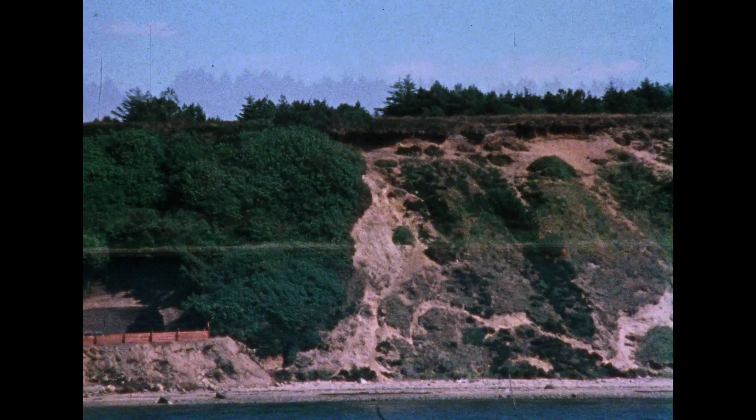A bridge that not only benefits local traffic, but also supplies the missing link in the diagonal cross-country road through Jutland, from Aarhus northwest to Viborg, and Skive, and on across Mors to Thisted, right up to Hanstholm.

Previously, the ferries plied between Pinen and Plagen, that is, the pain and the plague, 135 times a day. But finally the pressure of traffic was so great that there were often long waiting times.

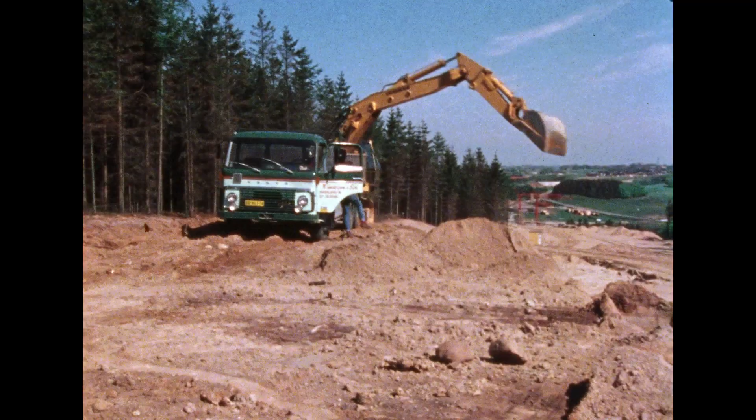In addition to Sallingsund Bridge, adjoining roads and bridge structures had to be built, covering a total length of about 40 kilometers.

The neighbouring roads pass through some of the prettiest scenery in Denmark. This is how it looked before the bridge. The connection was to lead through the hills called Legind Bjerge.

On October the 5th, 1973, Per Milner, the head of the road directorate, signed the contract with the Sallingsund consortium, which consisted of the Danish engineering firms of Kampmann, Kierulff and Saxild and Højgaard Schultz, together with the French firm of Campenon Bernard and the German firm of Polensky and Zöllner. At the international tender, these firms were the cheapest, offering an alternative project both for the substructure of the bridge and for the superstructure, based on prefabrication.

On November the 19th, 1973, work was officially set in motion by the Minister of Transport. The head of the road directorate spoke first.

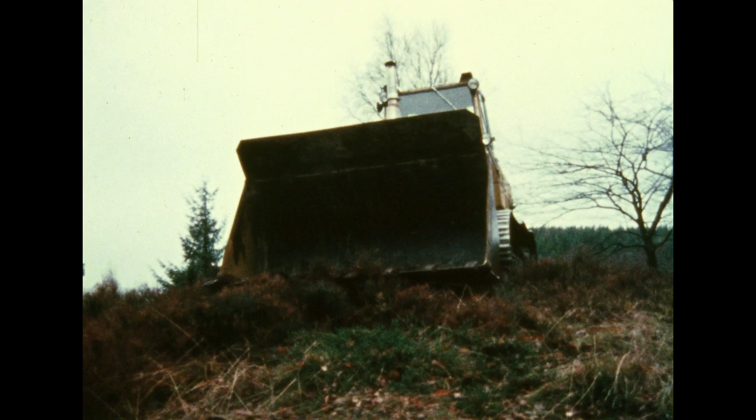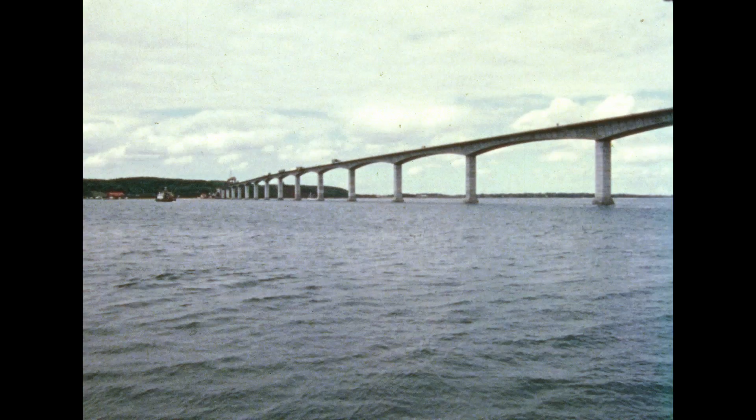The bridge is 1,730 meters long, with normal spans of 93 meters, side spans of 51 meters, and 2 navigable passages of 60 by 26 metres. The 16-metre broad cross-section between the 2 windshields is divided into an 8-metre carriageway with cycle paths and pavements on both sides.

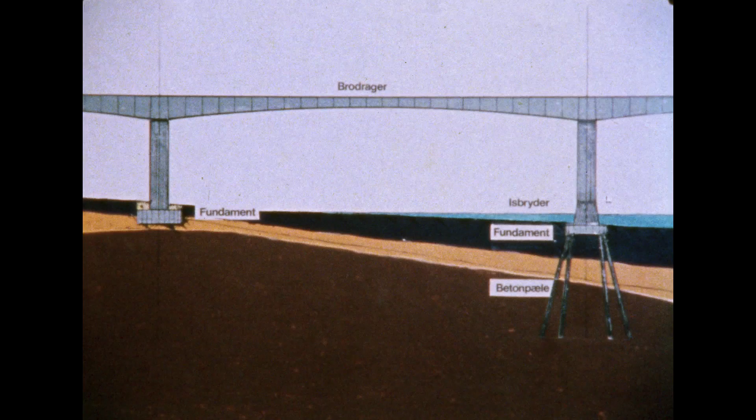Pier 1 is founded directly on the seabed. Pier 2 is founded on reinforced concrete piles. Most of the piers in the water are founded on steel piles, filled with concrete.

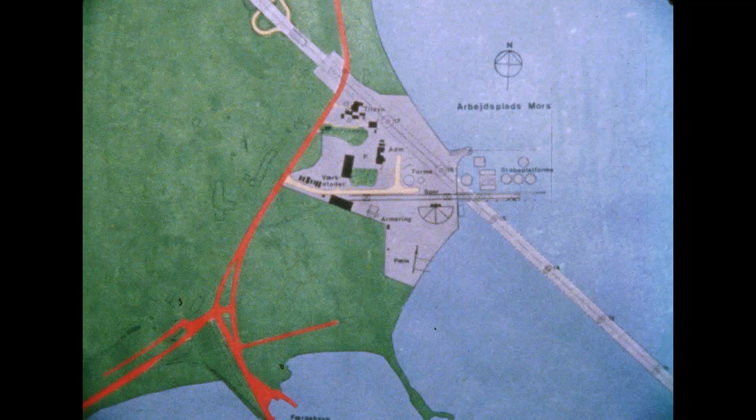The complete substructure project was carried out from the site on Mors. Here are the stockyard and the production area for the tubular steel piles.

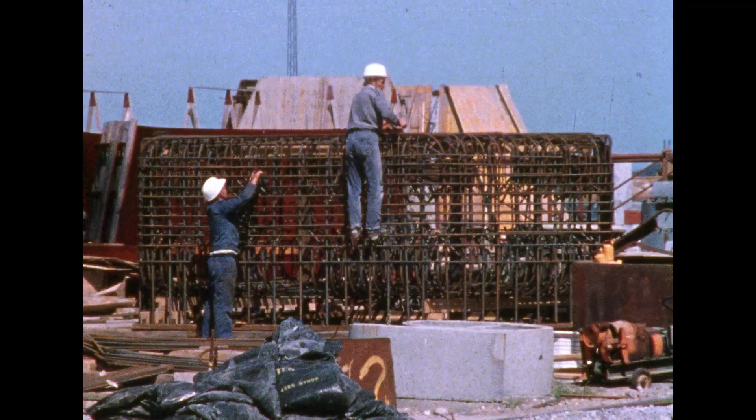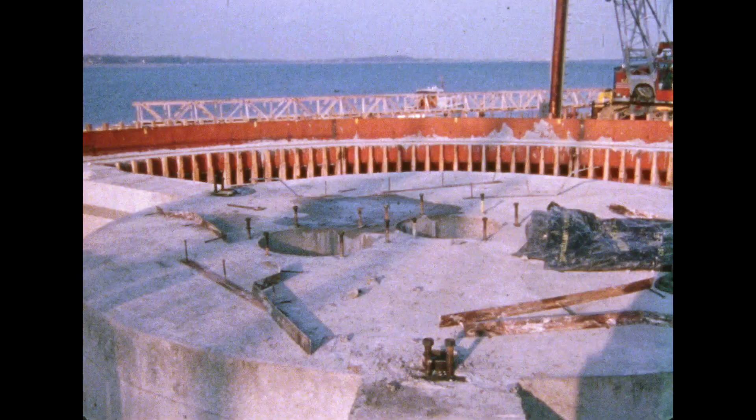The reinforcement for a piling template was prefabricated complete in one unit, before being transported to the casting platform. Here we can see the holes for the piles in the template's ring-shaped casing. A floating crane transports the template and lowers it down onto a special platform.

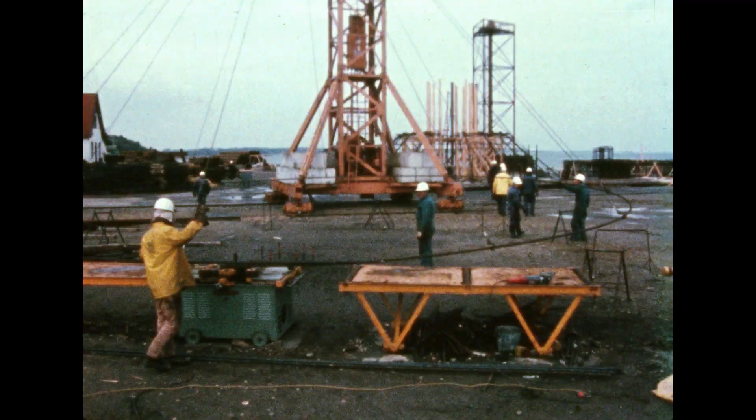Here, the reinforcement is bent for the pier box. The final length is measured and the rings are butt welded.

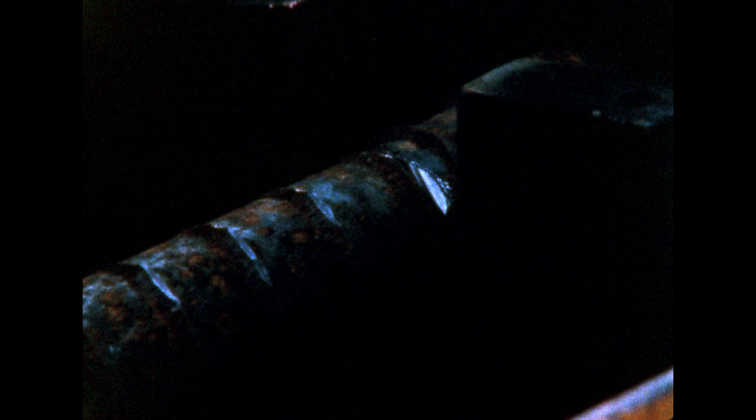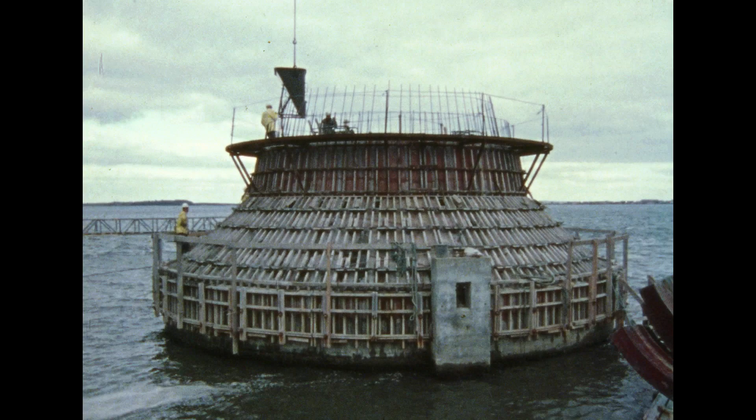Construction of the reinforcement for the lowest part of the pier box is in full swing. Shuttering for the lowest part of the pier box has now been erected on a piling template placed on a platform, and concreting is underway. The projecting steel bars are starter bars for the central part of the pier box.

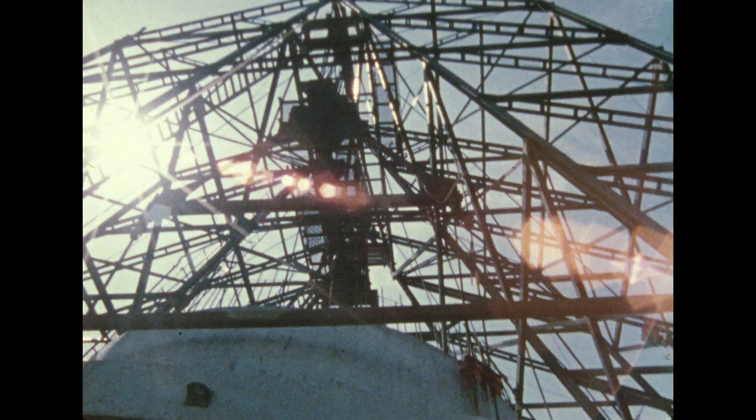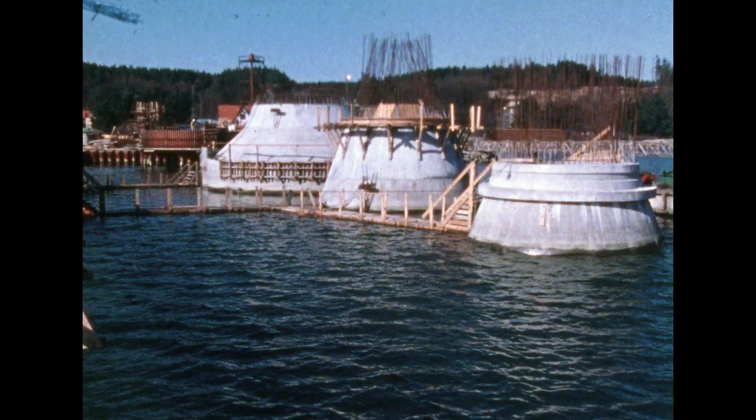As the lifting capacity and the height under the hook of the floating crane are limited, the pier boxes are cast in the working dock in 3 stages, 1 stage for each platform, and at 3 different depths of water, so that the final casting takes place on the deepest platform.

On the bridge centre line, there's about 15 metres depth of water, 15 metres of silt, 10 metres of loosely deposited shale, and under that the bearing layer of meltwater deposit. So we've got to get down below the level minus 40 metres to find a foundation layer, and it's this that has determined the choice of pile founding.

In all, 3 bearing piles are driven for the piling template. They're provided with caps on which the template rests.

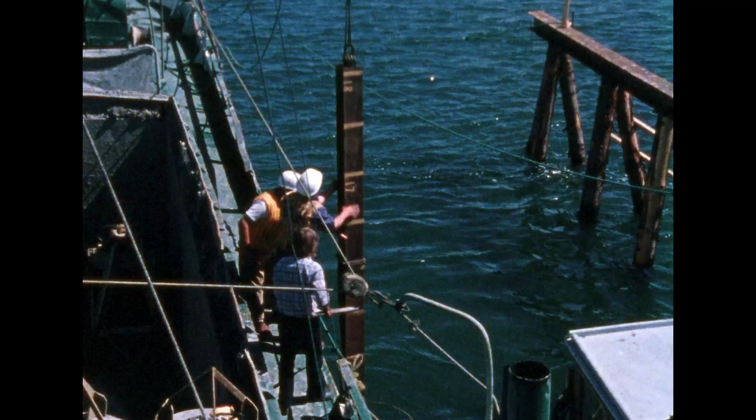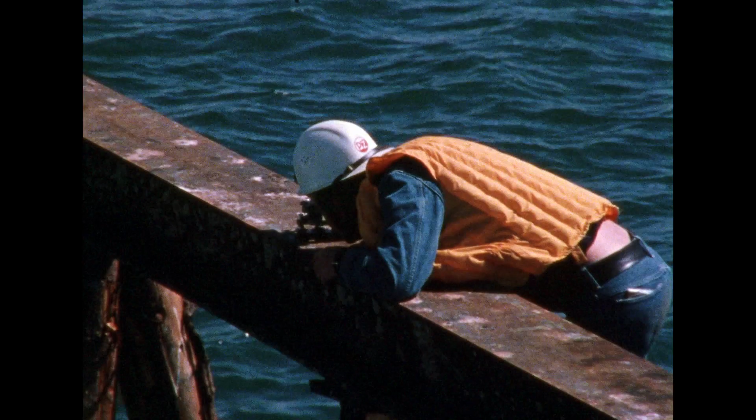Before these caps are constructed, the tops of the bearing piles are measured up in detail. The caps for the bearing piles are then tailor-made on land, using the measurements taken by the diver.

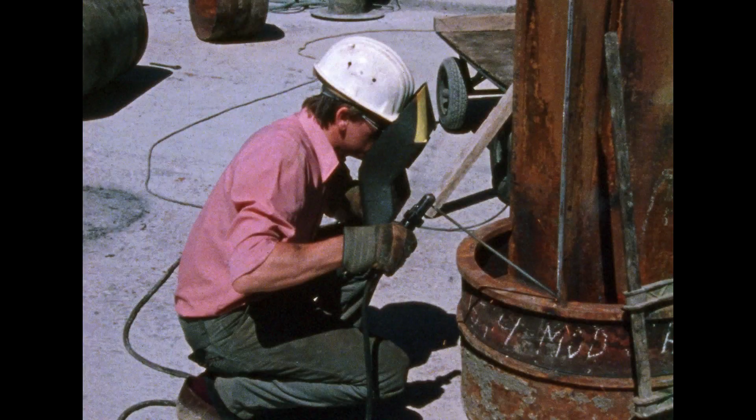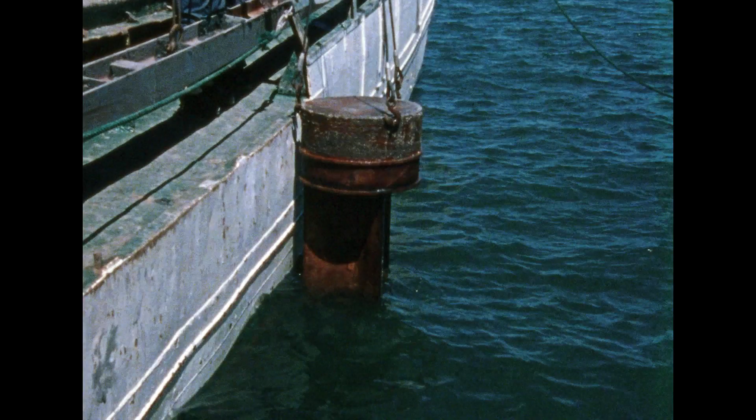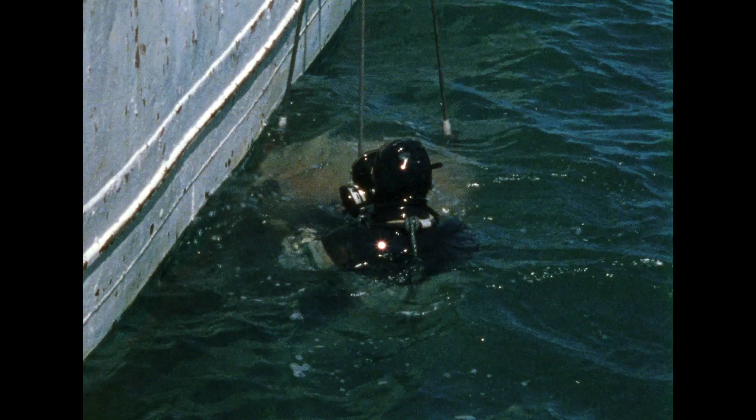The pile caps are fixed to the bearing piles with the help of a diver. The template is fitted with an alignment tower with optical plumb, so that it's possible from above the waterline to determine the position of the template.

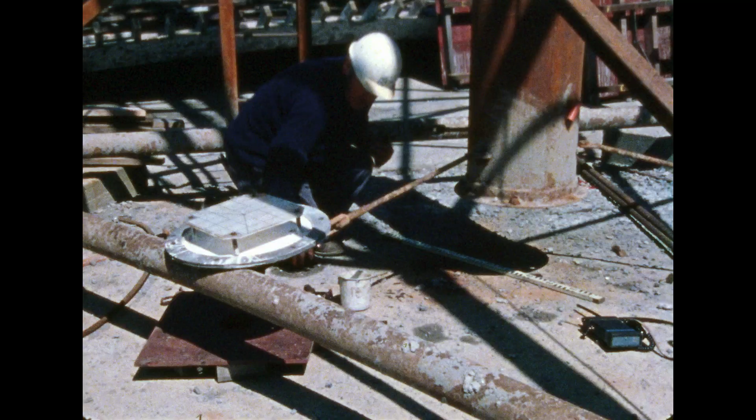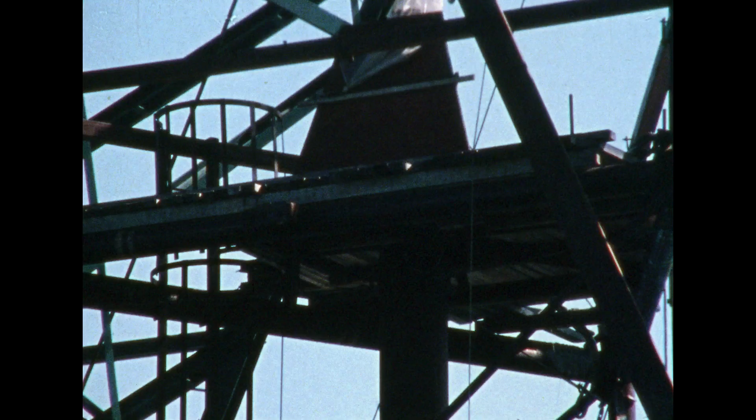The template is temporarily provided with 3 bearing girders resting on the bearing piles. The sighting plate for the optical plumb is fitted. The template with its alignment tower is now ready for submersion. The correct positioning of the template is ensured from the shore.

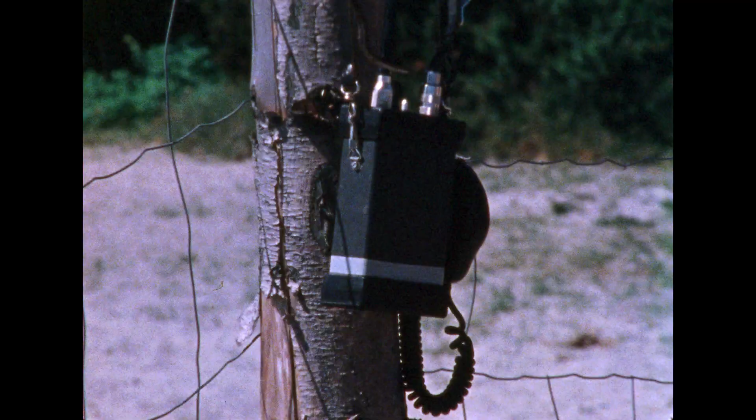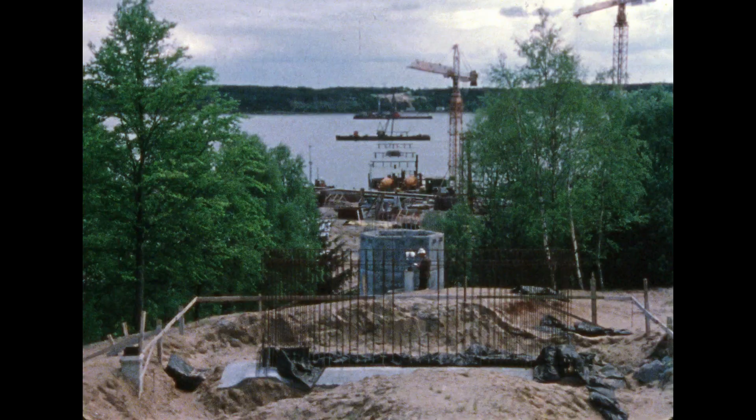And the positioning is controlled in the water with the help of the divers. A further check is made from both shores using the intersection of lines of sight. Here you can see the template with the holes through which the piles will be driven.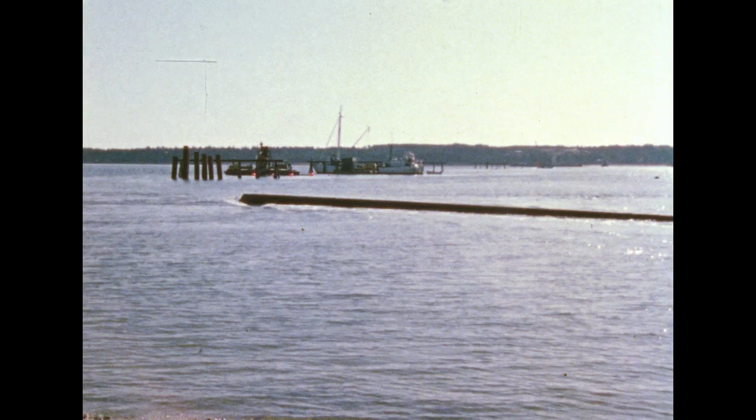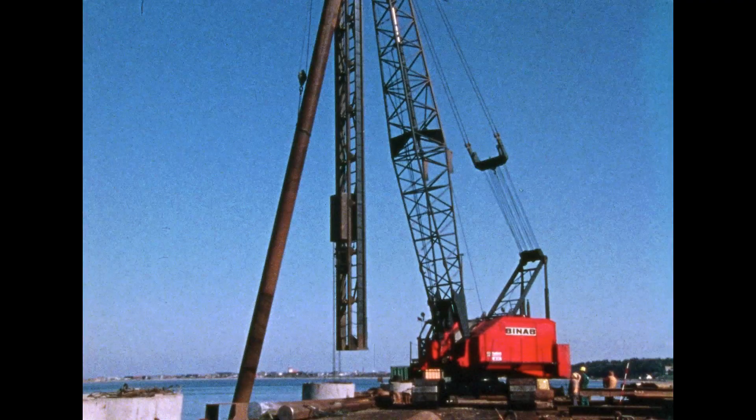The steel tubes for the piles have a diameter of 70 centimeters and an average length of 25 to 30 meters. The piles are driven through a guide tube which is kept in place from below by the template and from above by a girder system constructed between the wooden trestles and the pile driving barge. The lower 2 meters of the piles are filled with concrete and the piles are driven internally with the aid of a dolly.

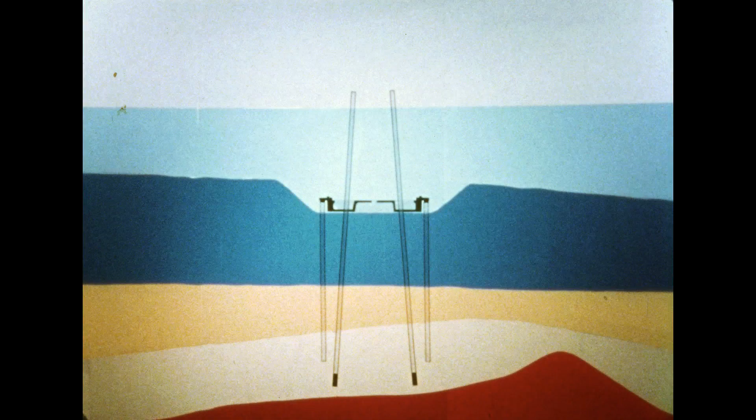In the first instance, only a limited number of piles are driven. These are the test piles, together with a central pile and counter-action piles for the test loading. Test loads are carried out at all the piers. These results, together with the results of the previous geotechnical tests, determine the number of piles, the pile toe levels, and the positioning in the template.

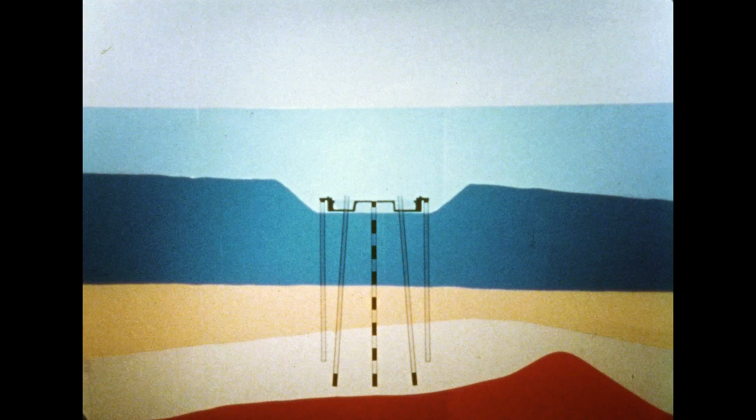Now the counter-action piles and the test load pile can be cut to level, and the final pile driving can take place. For the first piles, a 12-ton monkey was used. Because of the difficulty of the pile driving, this was later exchanged for a diesel hammer with a 5.5-ton piston.

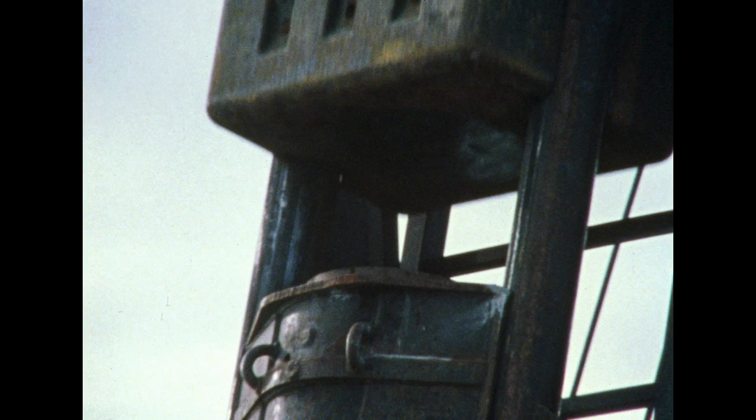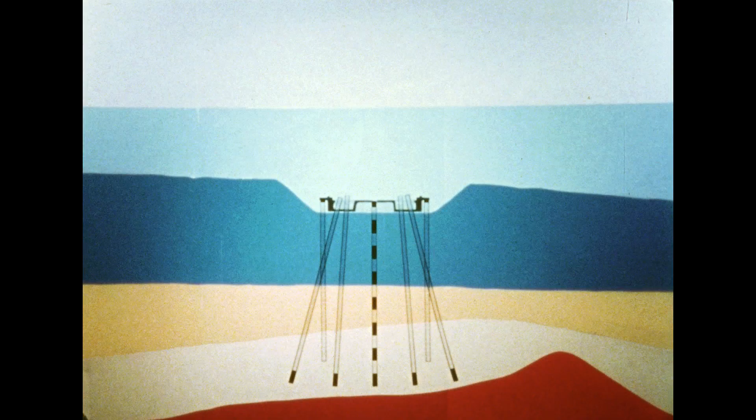The piles are placed in 2 conical surfaces, one with its intersection on the waterline, the other with its intersection in the bridge girder. Here we can see the template with the piles driven and shortened. Now comes the casting with underwater concrete around the pile heads. For this, mobile casting equipment is used, and the casting is made right up to the edge of the casing.

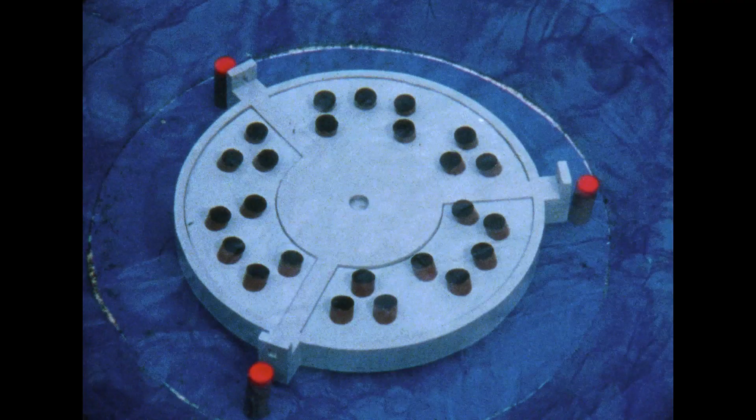To prevent corrosion, the uppermost part of the piles is reinforced with a prefabricated cage. Now the bearing girders for the template can be removed. Here is the casing, fully cast. The position of the concreted template is checked with the aid of the alignment tower. The pier box is equipped with a temporary cover.

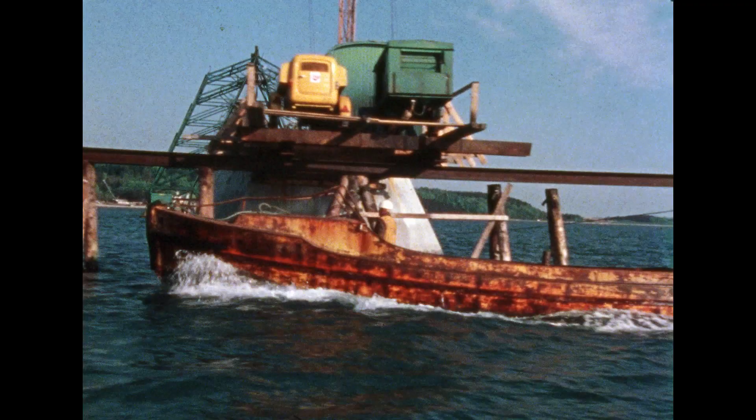Air is pumped into the pier box so that a balance is achieved between its weight and the crane's lifting capacity of 200 tons. The pier box is transported out and lowered onto the template. The pier box is equipped with an alignment tower.

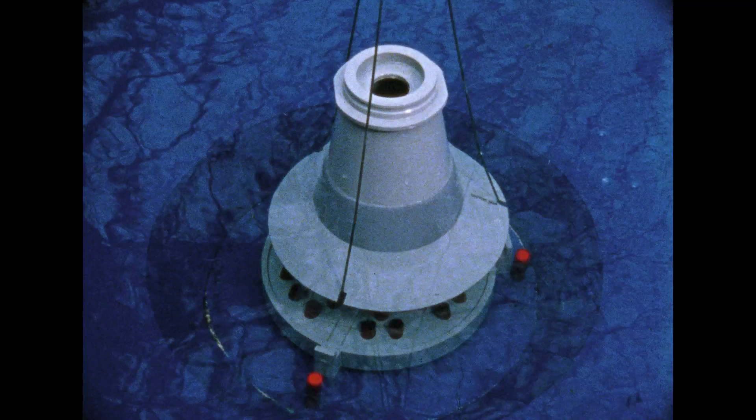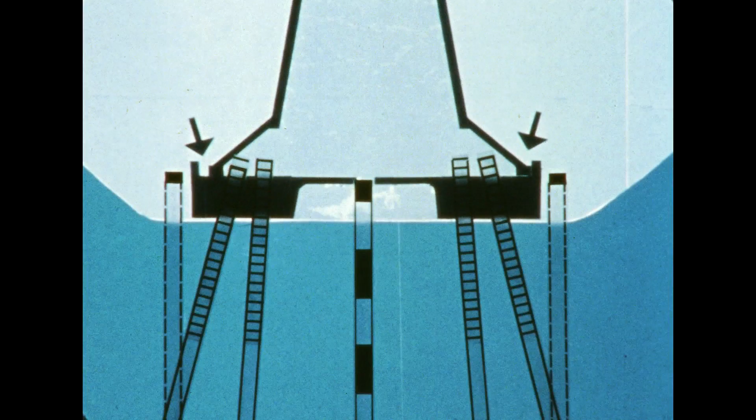If the template is out of line with the correct position, it's possible to position the pier box eccentrically in relation to the template. The joint between the template and the pier box is sealed with a rubber gasket. Then the icebreaker unit can be placed.

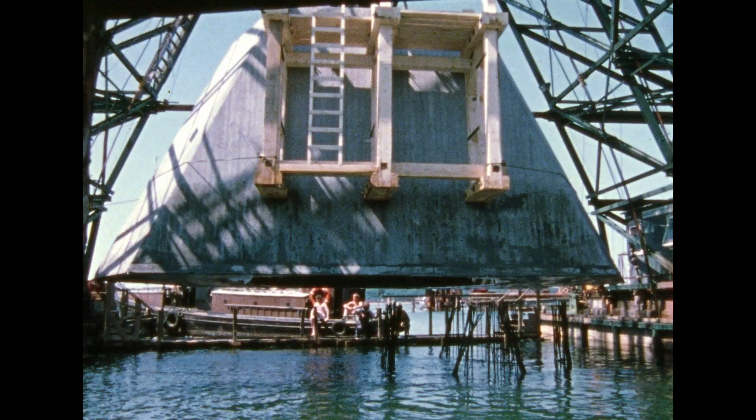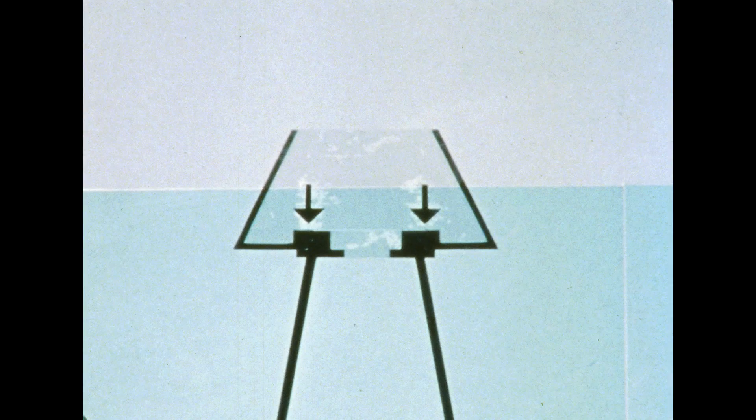It's transported out with the aid of a floating crane and placed on the top of the pier box. The space between the pier box and the icebreaker is filled with underwater concrete. A cover is fitted over the test load pile.

The water is pumped out of the assembled units and a working chamber with normal pressure has been created. The pile reinforcement is raised up into place and the piles are cast. The ring-shaped body above the pile caps is reinforced and cast. In the same way, the icebreaker box is reinforced and cast too.

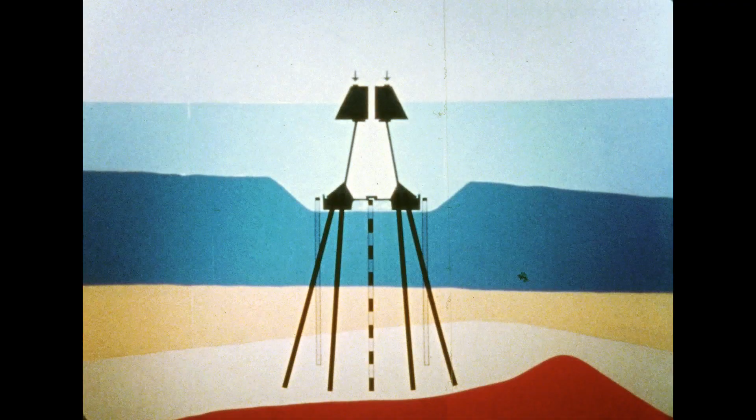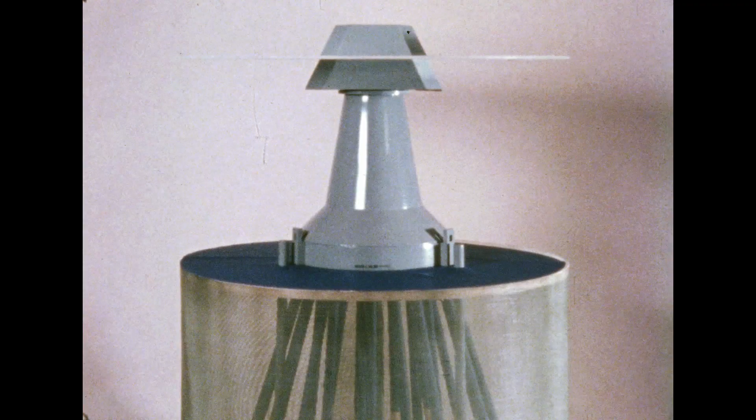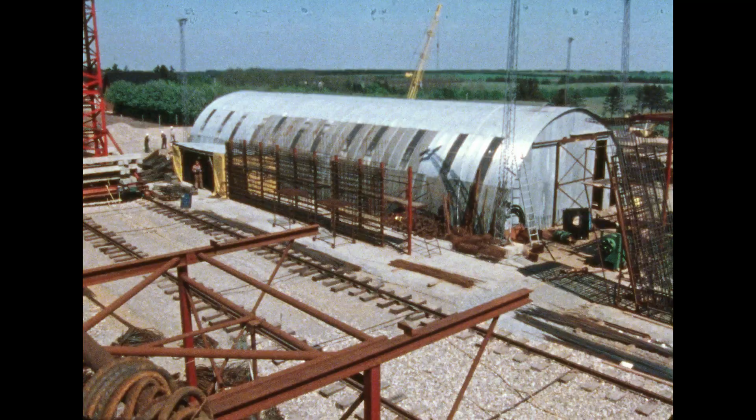As we can see, the bridge superstructure is made up of segments, standard segments in the spans and pier segments above the piers. All the girder segments are constructed at a field factory on the Salling shore. Here the reinforcement is assembled in units.

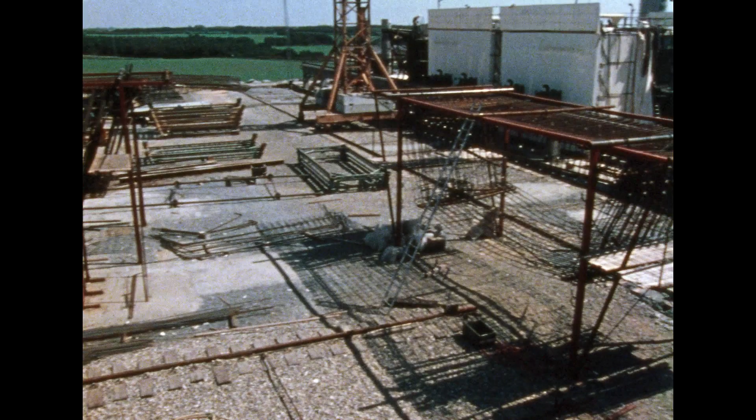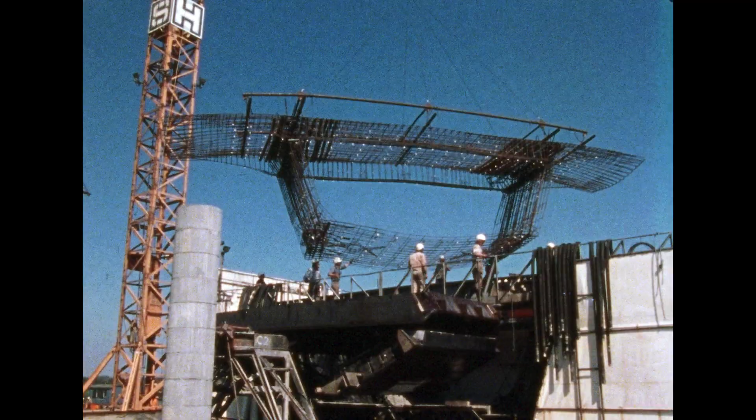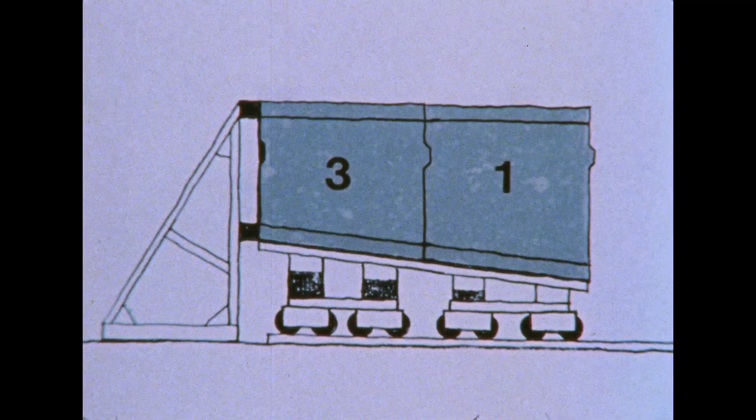These are the casting molds. A completed reinforcement unit arrives at the casting mold. Here in diagram form is the casting of standard segments. The principle is that the two segments that are to lie side by side in the bridge girder should also be cast against one another, side by side. The segments are placed in the storage yard.

The gantry has a central support, a rear support, a front support and a mobile support. In the situation shown here, neither the front support nor the mobile support are in use. The gantry is equipped with cables which ensure distribution of the load between the central support and the end supports. A trolley is suspended under the gantry girder.

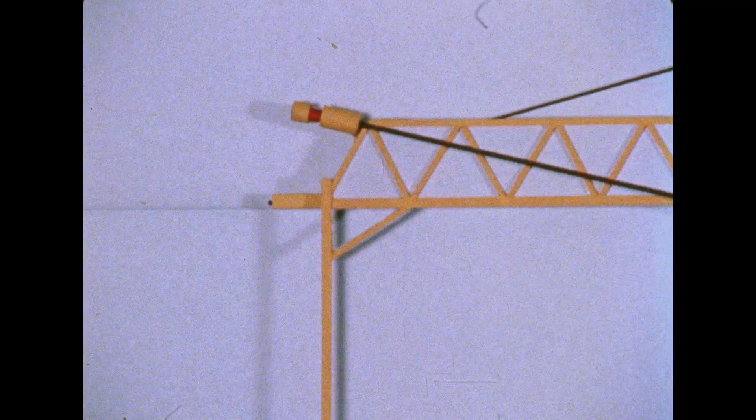Here, the gantry is being moved forward to begin the erection of the next span. In reality, the movement is much slower than shown here. The same goes for all the other model recordings. Now the gantry is in place. The front support is adjusted, and the gantry's cables are tightened to relieve the load on the central support, which is resting way out on the newly assembled cantilever section.

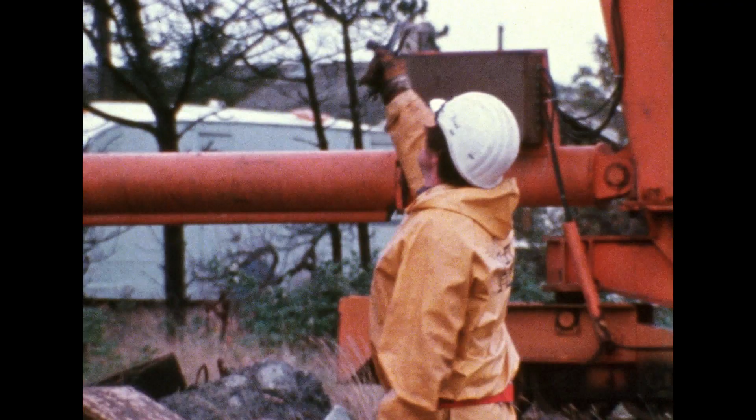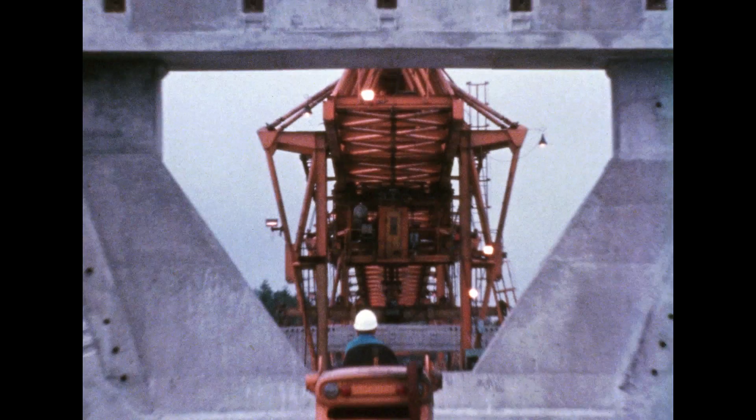The first pier segment, which is transported by low loader, is suspended from the gantry's trolley. A pier segment is removed from the storage yard by a portal crane and placed on a low loader. The segment is turned 90 degrees and the trolley with the segment is driven forward to a position in front of the front support. The segment is again turned 90 degrees and lowered into place.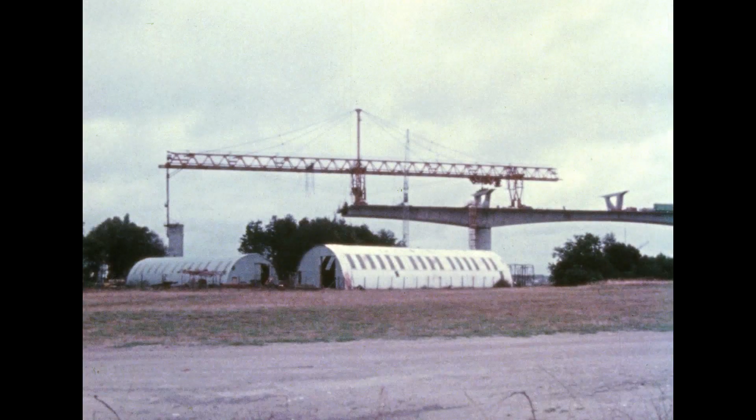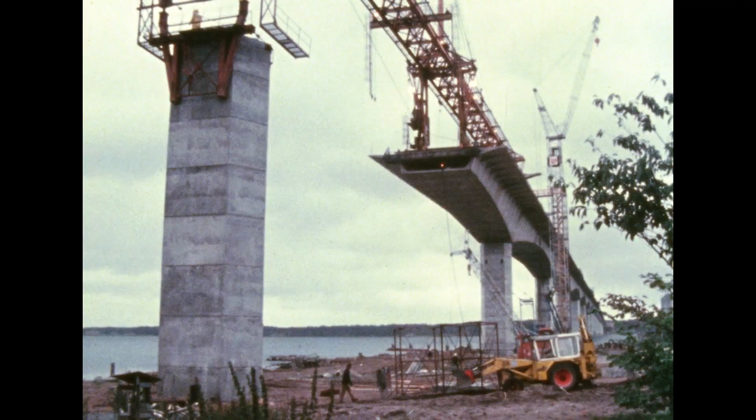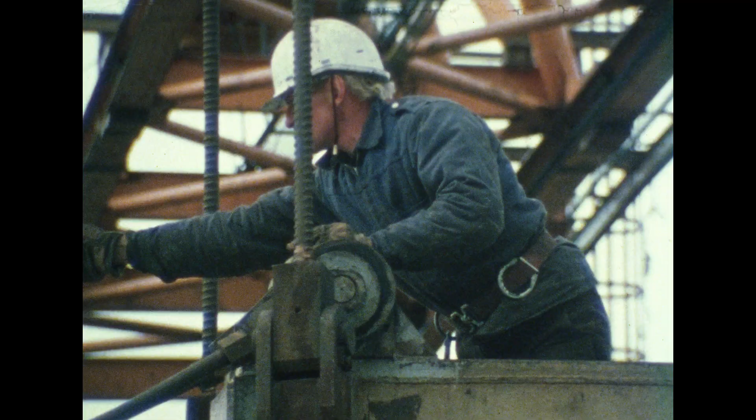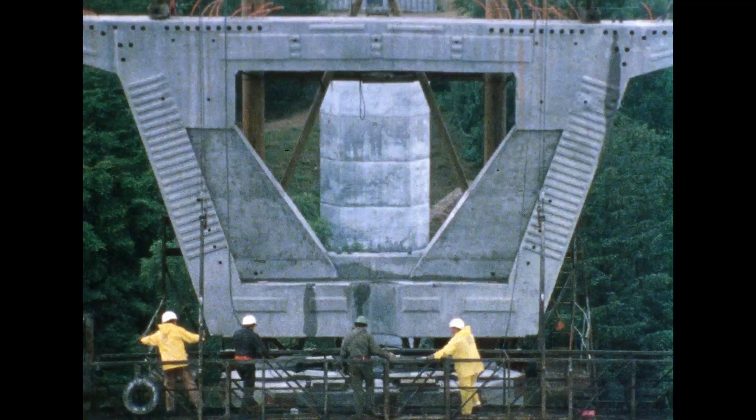The top of the pier shaft is fitted with temporary bearings and adjustment devices. The second pier segment is similarly erected, together with the first standard segment on the Salling side. These are glued together and held by Dywidag rods, which are fitted inside in ducts embedded in the concrete, but shown here on the outside.

The mobile support arrives on the low loader and is suspended from the trolley. The trolley is driven to the central support. The load on the central support is transferred to its auxiliary support by means of jacks. The central support's crossbeam is transferred from the main support to the mobile support. The trolley with the mobile support is driven to the pier shaft with the newly erected segments.

The mobile support has taken over the role of the front support. Pressure is relieved on the central support and the gantry moves relative to the mobile support with the aid of the trolley's motor. When the gantry has moved out a certain distance, its cables are slackened. The gantry moves on until the central support is abreast of the mobile support. The gantry load is transferred from the mobile support to the central support.

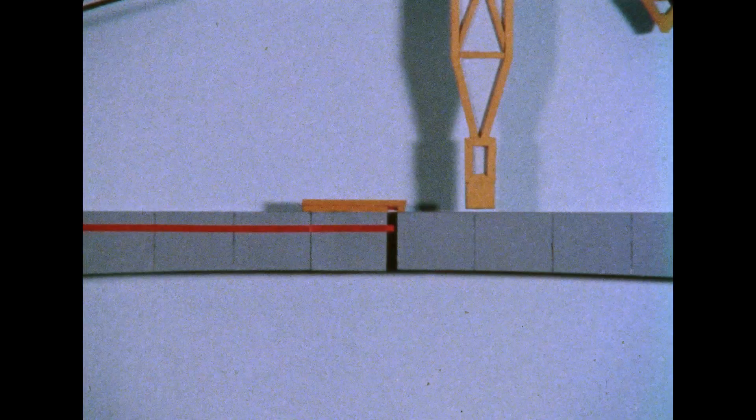When all the 12 segments have been assembled on both sides of the pier shaft, the closing segment in the last span is lowered into place and is borne temporarily by a special girder construction. The segment is bolted to the previous one. The final joint is sealed by in situ casting.

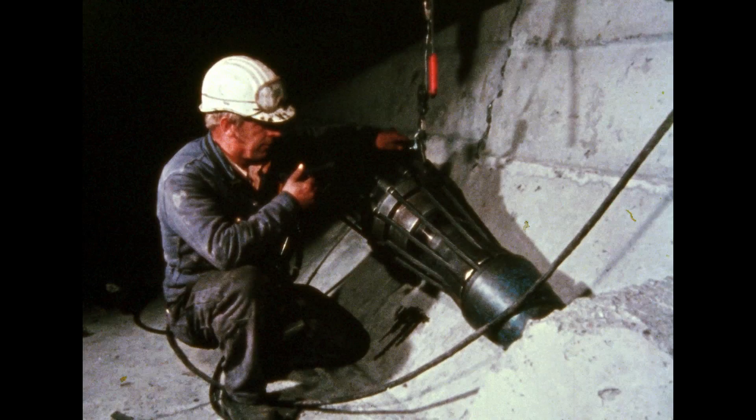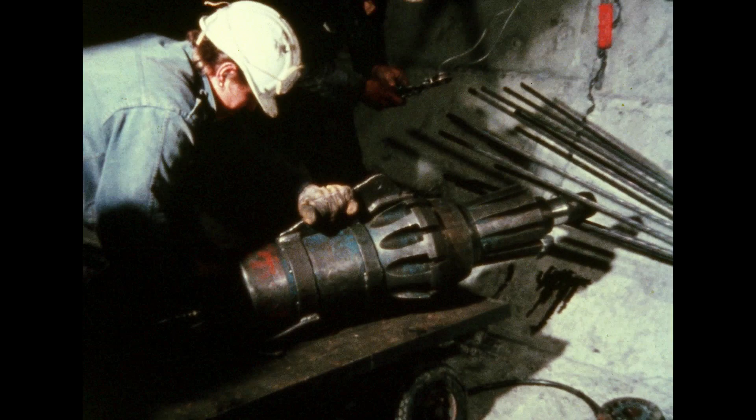In addition to the cantilever cables, which we've seen being tightened during the assembly of the span, there are cables in the lower section symmetrically positioned around the middle of the span, the so-called continuity cables. Here we see them being tightened. All that remains is to cast the edge beams and complete the bridge deck with road surfacing and so on.

On May the 30th, 1978, Her Majesty Queen Margrethe II opened Sallingsund Bridge.

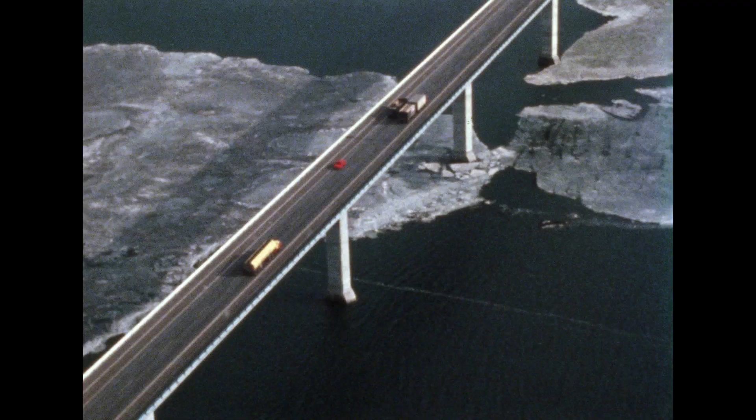The bridge is finished, for the benefit of the enterprising people in the district, for the good of the country's economic life, and for the pleasure of many tourists. Traffic flows easily and unhindered high over the Sound. Unhindered in spite of the ice that would otherwise have closed the Sound to the small ferries. An impressive new highway bridge in the Danish countryside.